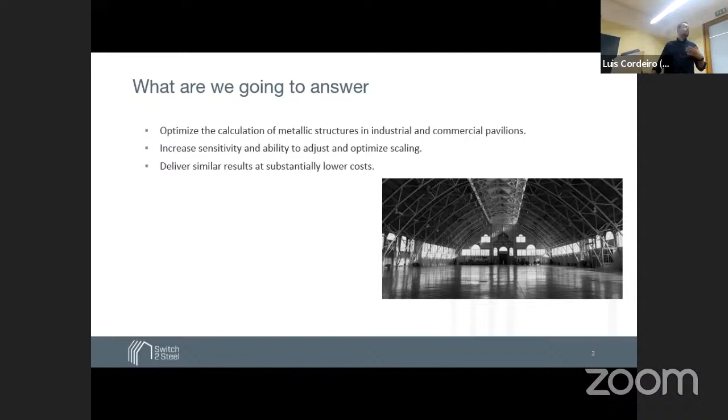The problem, as presented before, is that we have continuous legislation changes. We have legislation throughout Europe, but then very specific country-focused legislation, and we need to consider this in all the steps of what we are doing. It is really difficult to calculate these structures - so many options, so many types of steel, so many types of solutions. We tried to gather all the benefits of these different options and put them together in a way that we can provide solutions. You can simulate different options very quickly, and find quick and efficient results.

Always keeping in mind compliance and safety as presented before, and again the application, ensuring that these legislations are properly applied to all aspects of what we are doing. That is really important. And again, the protection for fire, which is one of the main drawbacks of using steel - we can identify in an automatic way which is the best solution for your specific needs, and give you an estimation of the cost. You can also compare it easily with other options available, ensure that these options comply with legislation, and in the end give the power to the user making these simulations and analysis.

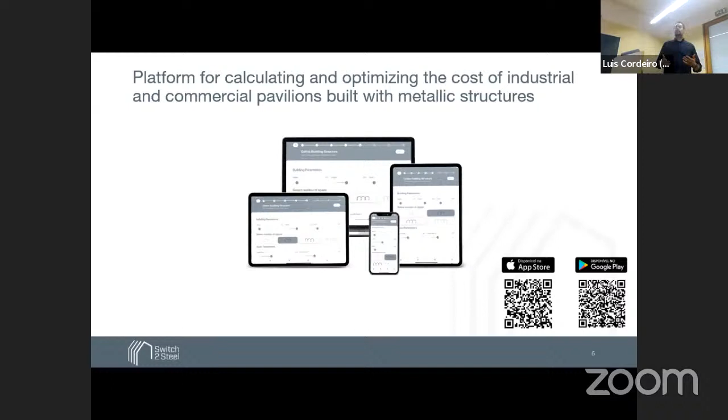Here you have the links for the application. The application, the platform that was developed, is already available for everyone to use. Of course this is ongoing work, so we are improving it every day. You have the application for Android and for iOS. You download it, define exactly what you need, and we process all your requirements and give you the results of what we believe is the best solution for you. These calculations are not done on your mobile phone because they are quite extensive and take some time, so you will receive a report and notification when the calculation is done. Depending on what you need, it can take from a couple of minutes to a couple of hours.

So the goal is exactly to have a multi-channel approach for everyone to access the tool, and then parameterize exactly what you need and get optimizations with different techniques of the structure and also the protections that are needed, taking into consideration the legislation, the characteristics of the pavilions, the fire protection, the transport, the seismic resistance, and the environmental impact throughout the whole chain of the building, from beginning to end.

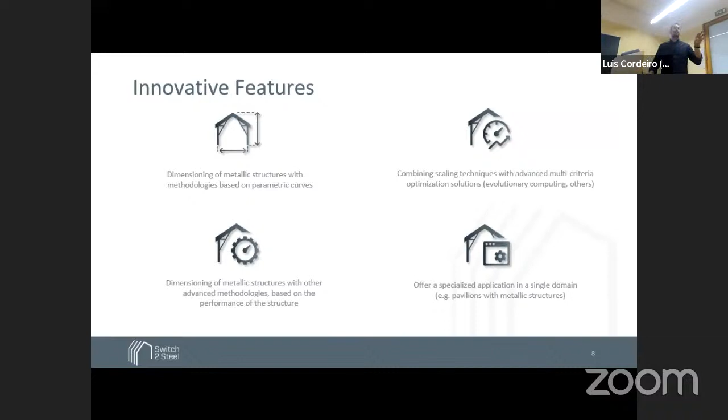As you can see, there are a lot of innovations here. We identified 4 innovation aspects of this work: the dimensioning of the structures, the combining of different techniques to give you the best solution, which will be presented later in more detail, and the dimensioning of the structure again with quite different solutions based on characteristics, basically a very focused solution on pavilion construction with steel.

Very briefly, and my colleagues will present this in more detail, we used genetic algorithms for some optimizations. Room and elevated temperatures were taken into consideration throughout multiple steps of the process. We used the finite elements method for some of the analysis and optimizations, always considering the applicable codes in all aspects to be compliant.

Instead of presenting the application with slides, we are going to have a real-time demonstration. We'll split this into phases: the first is where we say what we need to build, and the second shows the result. We'll design a complete step with some predefined configurations, and since that algorithm takes around 20 minutes to run, we'll look at a pre-calculated example.

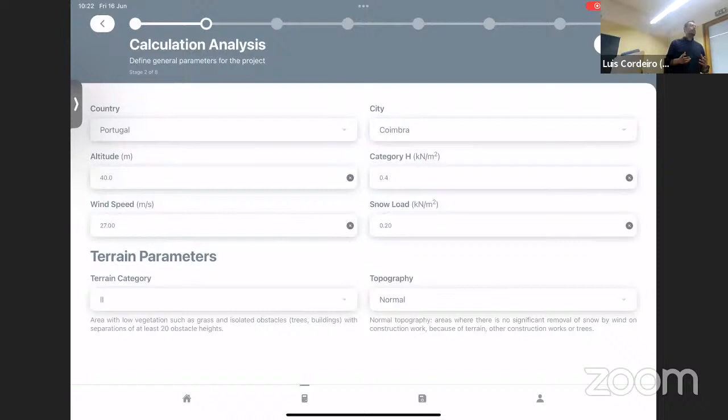Then we have the characteristics of where we are going to place our pavilion. We identify the country, the city, the altitude, the wind, and also the terrain topography—many characteristics that are critical for the proper assessment and optimization of the pavilion we are going to build.

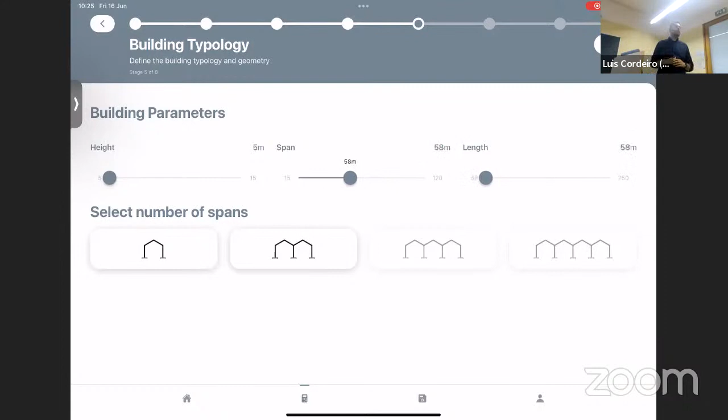When you start changing these parameters, we already limit the number of spans you can add. For example, if you select a quite wide span, you cannot build only one—you'll have to build 2 or 3 spans, depending on what's needed. The platform automatically helps you to make sure you reach a proper, feasible solution. So we're going to use these parameters with 2 spans, and we can even specify different sizes for each span—again, the system helps you with that.

Now that we've identified the spans, what do we need to do next? To identify our openings. What type of openings can we have? We have doors, windows, and roof openings—how many, and in which of the spans. That's configured there.

We can define a door, for example, and specify exactly its size and where it's going to be in our building—front, back, left, or right. This also considers the joint connection between the two spans; we can have doors there or not, depending on what we're defining. In this case, my colleague is creating a door there, and we can also create a window.

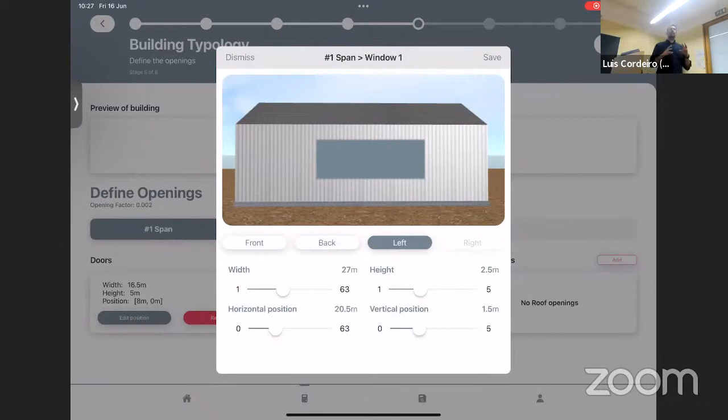Okay, we select the door in the front. Now we have the window on the left. Again, positioning exactly where we need or want it, because this will have quite an impact not only on the structure, but mostly on the fire protection. This will influence a lot of the heat dissipation and how we need to protect our structure.

Based on this, of course, door, windows, and then we have one of the most important for fire protection, which are the roof openings. Again, we position exactly the openings, how many we want, fully customized to fit what you need. Remember, you can build one simulation and then build on top of that a new one, meaning you can test without openings in the roof, then simulate with openings spread around the roof, and assess exactly what the difference is going to be, both in terms of the structure, mostly fire protection, but also cost, which at the end, most of the times, is the most critical one.

So we can continue. Again, we have defined only for one span. It's going to be exactly the same for the other one. So next.

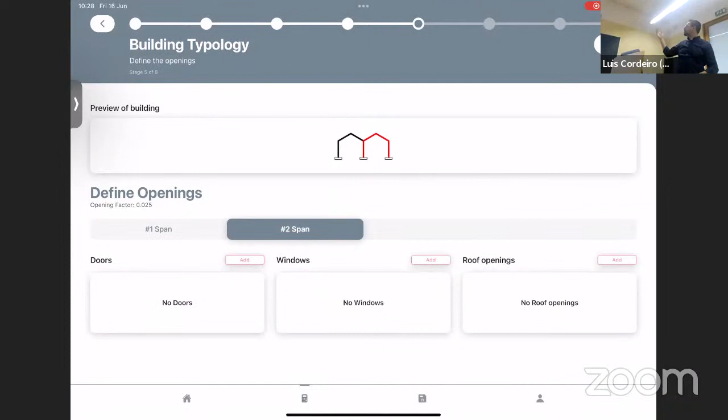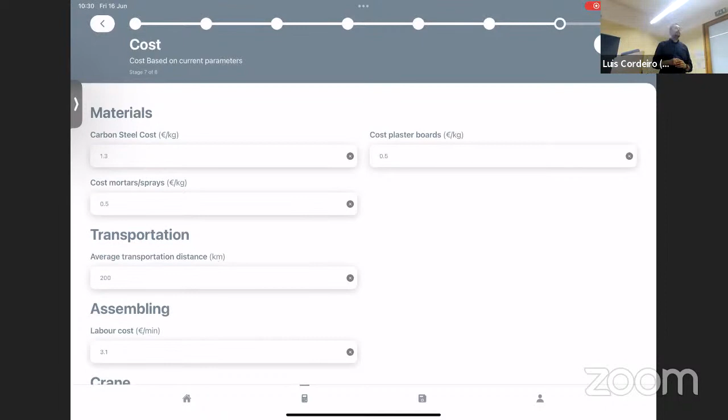Now we have the costs, one of our last screens. We have used the average costs for the materials and labor that we have identified, so these values are already preset in the configuration. But each one of you can define your own, because each company has a different way to negotiate and has different values most of the time. So you can define your own costs here and use them for the cost simulation.

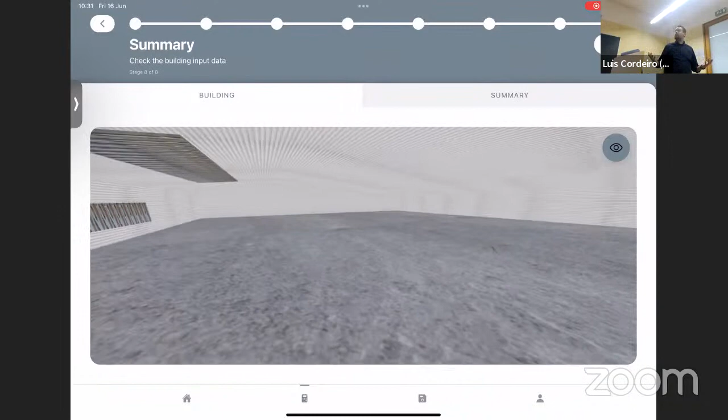Okay, and finally you can go to the next screen. We have the summary. Here we can see exactly what we have set. As you can see, we have a 3D model that you can play around with on your mobile device or here. You have the building. If you look inside, there is still no structure because we haven't yet started our calculations, but you already see the openings and how the building is placed, to validate it's exactly what you need. You can go to the front, left, or right visualization to focus more there.

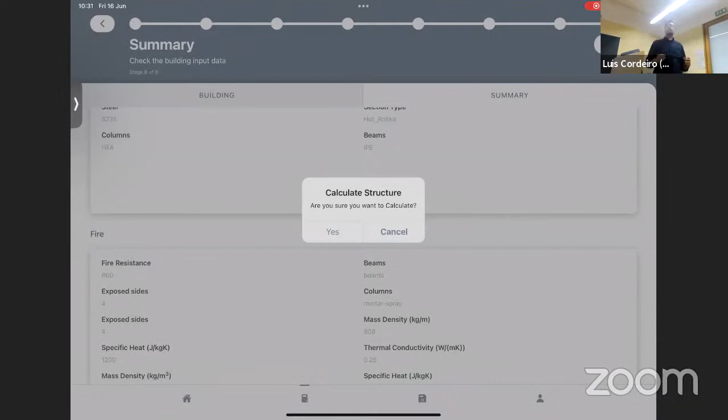Then we have the summary, which is basically just an overview of everything you have selected before. Then we have the final button to select, which is just do your work, calculate everything that I have asked for. Of course, we are going to do this, and it will take some time. So let's go and see this simulation already calculated.

Okay, so here we have the demo, and this is basically the final screens that we get. We have a summary, and now the 3D visualization again. But the big difference is that if we go inside, we already have the structure. All of this was calculated using all those optimizations that I talked about, which my colleagues will describe in more detail next.

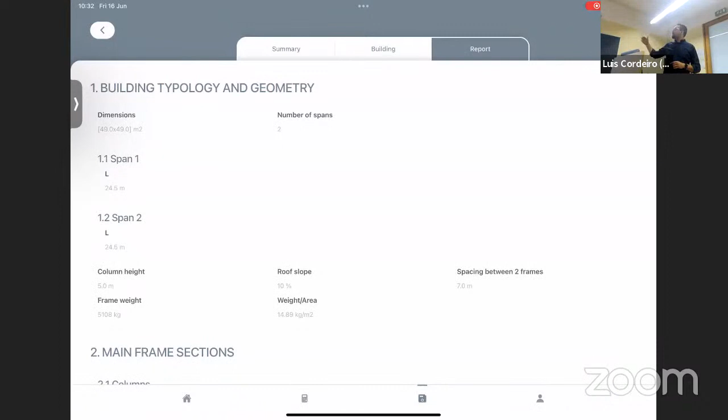And you can visualize everything from this perspective. Then we have quite a comprehensive view, okay, we can see only the structure. So if it's easier to identify, you can select the beams and get the details of each one, the columns, all of that. And we have the report, which at the end is what we really need, composed of some generic information. We have all the information about the structure.

Going down, of course we have an advanced version of the results that is provided, but this is the summary, which is usually the most relevant one. So we have the structure information. Going down.

Then we have the fire protection aspect. So what was identified as the optimum solution for the fire protection. And finally, the costs. Again, the costs—we have the steel costs, the transportation, the assembly, the fire protection, and at the end, the total cost.

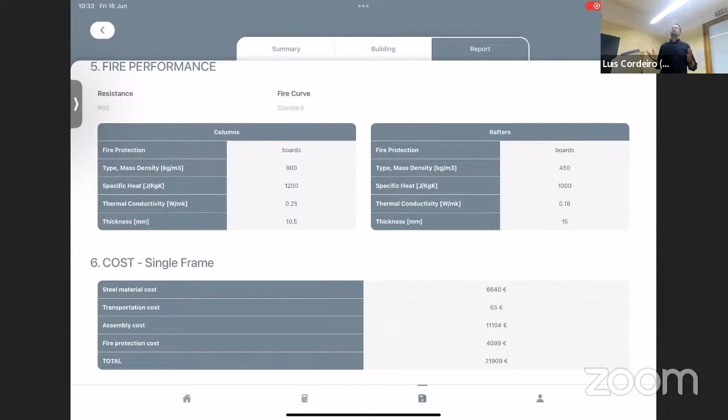This is what we have developed in this project and what is now available for you to experiment with, to use, and to give us some feedback on what was done. And with this, I conclude my presentation.

If you have questions, I think it's better if we address them all at the end.

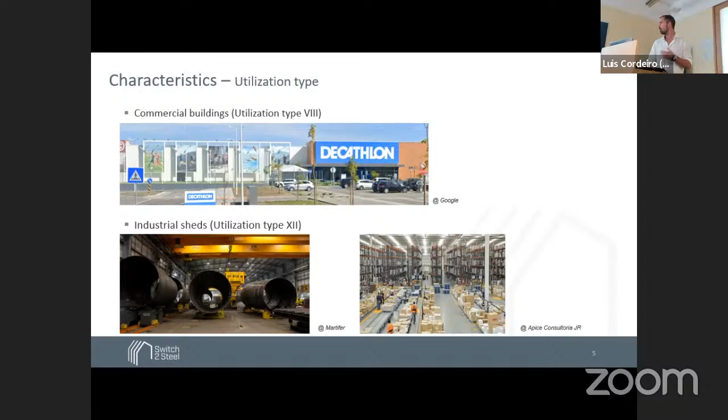So in terms of the utilization type of the buildings, as we said many times, it's mainly the industrial sheds, but also the commercial buildings, mainly based on a portal frame design. So the different typologies are covered in the app. Here you can see several typical examples.

Also, we identified—this seems very obvious, but in fact it's quite different—what kind of rafter you have in the top of the building. So is it just a uniform member? Is it a tapered member with haunches, with different variable cross sections in an area closer to the column, closer to the apex, and so on? So all of these aspects are something that is really tricky to calculate, especially manually.

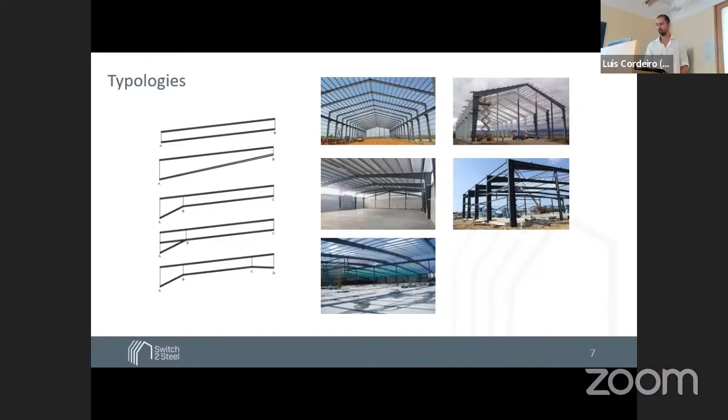It's impossible, in fact. And then also there are multi-span buildings up to 4 spans. Then all possible steel profiles that you can think of—hot-rolled, built-up sections, including class 4. This is something that is not included in many of the commercial softwares. And also you can see that there are tubular sections, so pretty much everything that is used in the design of this kind of buildings.

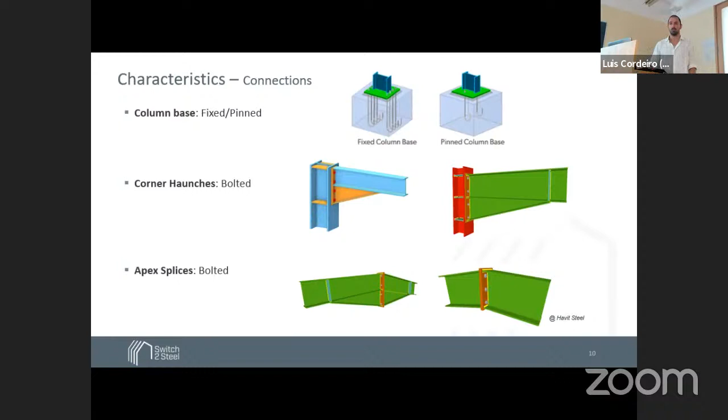Then also the connections, the base of the columns can be fixed or pinned. The corners, so this connection between the rafter and the column, it's a haunch that we also calculate, some pre-design of the connection, so it's not a full design, just a preliminary one. And then also there is at the apex a similar type of connection.

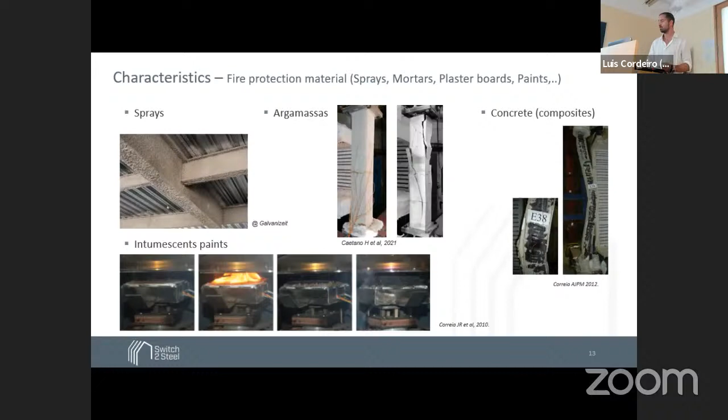Then the bracings, all possible configurations of the bracings and all possible types of profiles, mainly tubular cross sections. Then the steels, carbon steels are used in this project, so the conventional steel grades, not the high strength steels or stainless steels. And then also the fire protection materials - we try to include here all the relevant fire protection materials currently available on the market, including sprays, mortars, plasterboards, and paints.

So this is the scope, this is the scope of the project. But of course, as I said, there are some limitations. And first and foremost is the typology.

There is no trusses, at least not in this version of the project, so maybe in the future we will have Switch2Steel Plus or something that will include also the trusses. It's not difficult, but it takes a little exercise to play with the optimization of all these profiles. And also something like very specific geometry such as arches is also not involved in this project.

Then the dimensional limits - we put some limits in terms of the dimensions, something found in the literature. It's not that in terms of computation we cannot go beyond certain values, just that it doesn't make sense to allow the user to put 2 kilometers for the length or a height of 100 meters. So this is something commonly used for this kind of buildings.

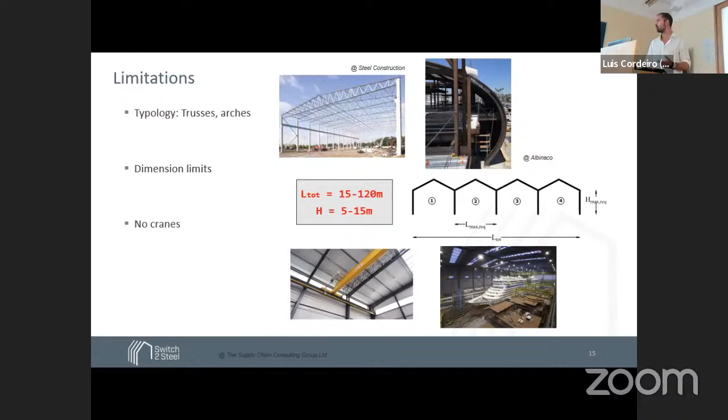And in terms of the loads - I will come later to the loads that are included - but the cranes and the loads from the cranes are not involved. So this is for warehouse buildings with storage, so the cranes are not involved. And also there is no explicit calculation of the foundations, so only the upper structure of steel.

Then the calculation algorithms - here I would divide all the calculations into 3 groups: the structural solver, the structural design, and the structural optimization. The solver is probably the best feature of this tool because we have our own solver. It's a linear solver, and for this kind of buildings with very severe stability issues and with variable cross sections and some very specific problems and aspects, it's almost impossible to use some simple databases.

Also, for this kind of buildings, as you may assume, it's really important to take into consideration second-order effects, and of course for that you have to have your own solver. So all of these aspects are covered both at ambient temperature and at fire design.

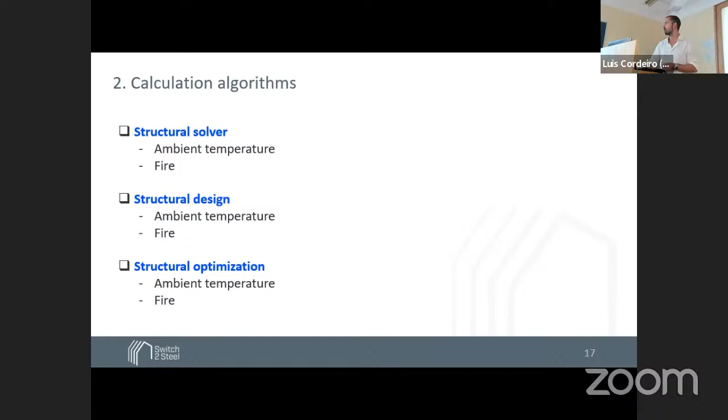So let's say something about each and every part of these algorithms. In terms of the structural solver, it's a linear elastic solver, so it's finite element based using beam elements. We use Python code here to write this.

And then what is also an advantage is that the load combinations and the load actions are automatically calculated for you, so you don't have to really go into the code and do the calculation of the coefficients, especially for the wind - this is really handy. And also automatically we generate the load combinations, so this is something done in a matter of seconds. I think this is a great advantage, because in the beginning I remember I had to calculate and check everything manually - for one of these it takes sometimes a whole day, or I don't know.

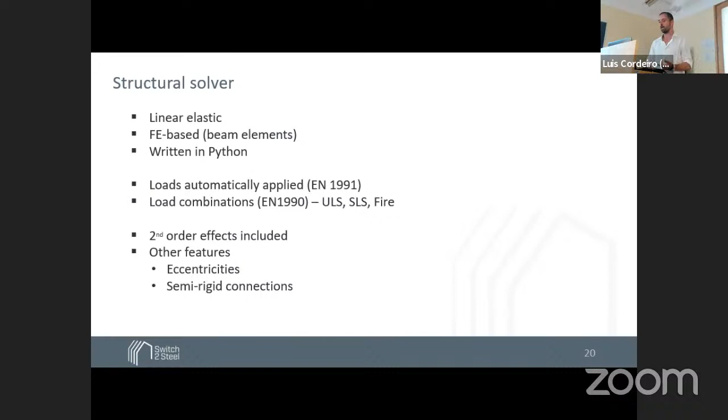There are some other features here, such as second order effects that I already mentioned. This is really important, and for that you need to have the solver and some extra possibilities such as eccentricities, semi-rigid connections, and so on.

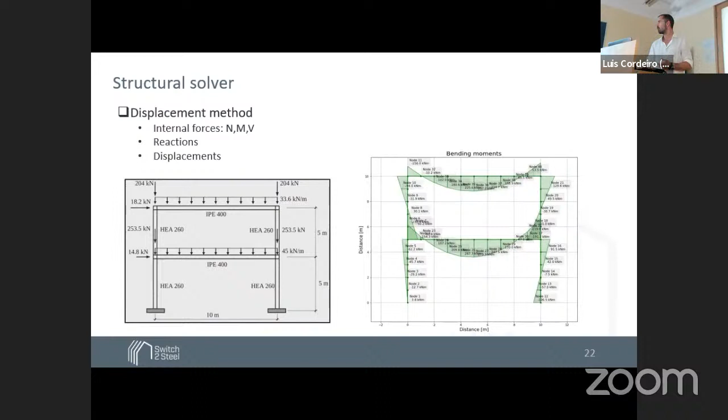The solver is, as I said, finite element based, using the displacement method. We build the stiffness matrix of the whole system, and such a routine is very convenient for Python code or any other language. We use Python. The objective of the solver is to get the internal forces, reactions, and displacement in every node, and from that point, using these results, we go to the design.

In terms of the load actions that are already involved in the solver part, we have the permanent actions, then we have the imposed loads. This is pretty much based on the Eurocode design, the imposed loads on the roof.

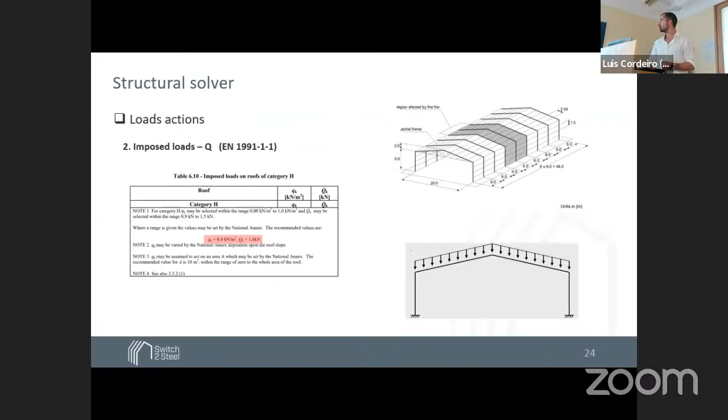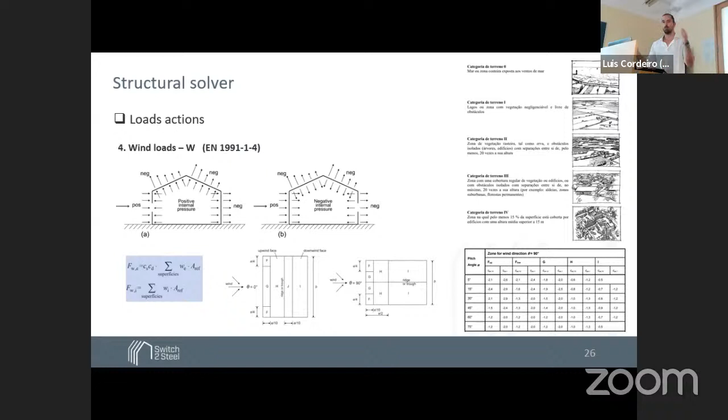Then the load combinations for ULS, the ultimate limit states, and for the serviceability limit states, are also calculated automatically for you and applied on the structure.

Other features: I explicitly included the second order effects using the stationary potential energy principles, so we can calculate the critical force, and then the second order effects are implemented using the amplified sway moments. Then the semi-rigid connections are also included—that's a possibility if we want to play a little bit with the rigidity between the rafter and the column or any other part of the structure. You can adjust the stiffness of the connection.

That was the solver. Once we have all the results, we can go to the next step, and there is the structural design. I'm not going to go into detail because this is very basic stuff from the Eurocodes.

For the ultimate limit states, we have to do the classification. As I said, we cover all possible classes, including class 4. Then the cross-section checks, the verifications, the member verification, stability—which is probably the biggest issue for these kind of structures—and then the connections. For the SLS verification, we verify the displacements, vertical and also horizontal.

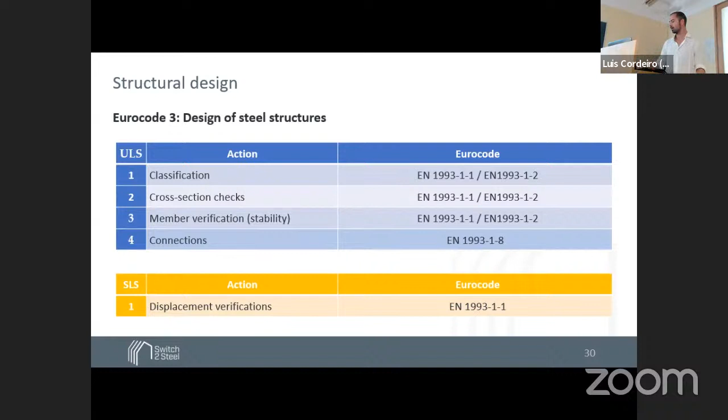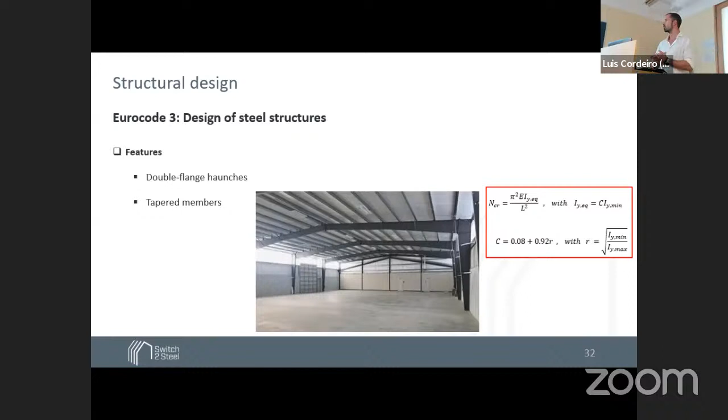This is one of the reasons why we opted for our own solver. You can vary the thicknesses along the length to optimize. In some cases, you can have a length up to 60 meters. The whole point of these structures is to consume the least material possible, and for that you need a proper solver to calculate the stresses and the forces in every part of the structure. This is done automatically.

Then there are some specific aspects for these kind of structures. We have the purlins on top of these buildings, and they can act as lateral restraints. But if you have wind, then the bottom flange, which doesn't have any purlin, is exposed to compression, and there is a problem with stability.

There is no such calculation provided in the codes, so we use some literature from King and SCI publications to calculate this kind of phenomenon. The point is that even if the top flange is in tension, there is some benefit from the purlins, and this has to be calculated somehow. In these SCI publications, we have this method, so this is also included here. Finally, there is a class 4 cross-section included.

This is something that is quite simple if you have just an axial force or just a bending moment for the symmetric cross-section. But in many cases, especially for tapered, monosymmetric cross-sections, the problem turns out to be a little bit more complex. So this is all involved in this calculation.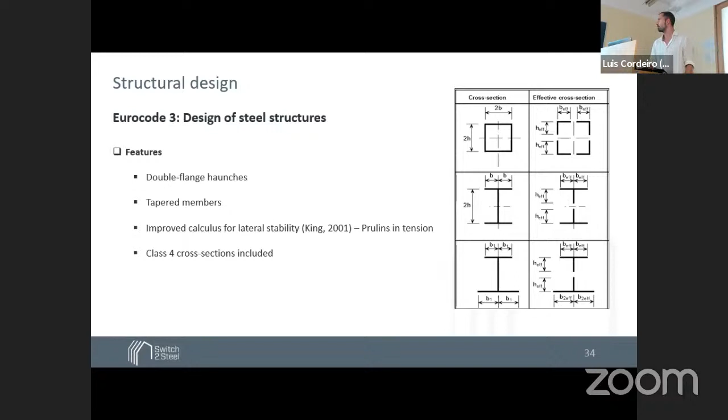And then last but not least, there is a fire design. Our methodology is based on a typical method that is used, with two steps. In the first part, we treat the fire load, calculating the fire curve. There are two options, as you saw in the app: a standard curve, and the advanced curve, which is the natural curve using another software that we linked to our platform.

And then the mechanical actions are included through the load combination, accidental ones from the Eurocode. So this is the fire load. Then in the second step, we have the structural response and the structural design according to the respective Eurocode 3.1.2. So this is also done.

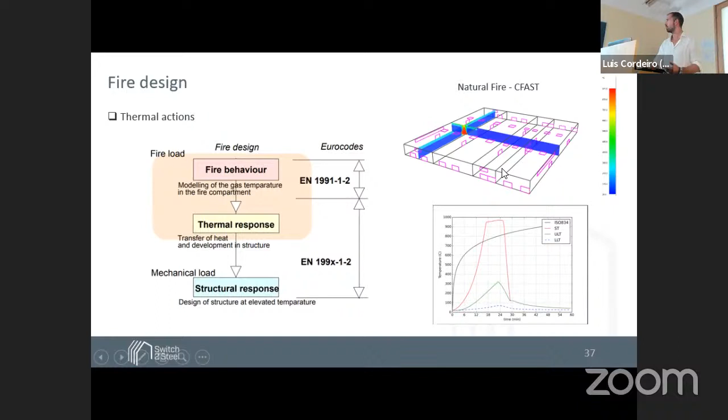And this is what we are doing in a matter of a couple of seconds. So this is the advantage of the tool. Then the second step is the application of the accidental loads according to the code. Then we have this heat transfer according to the code, for unprotected and also for protected steel cross-sections.

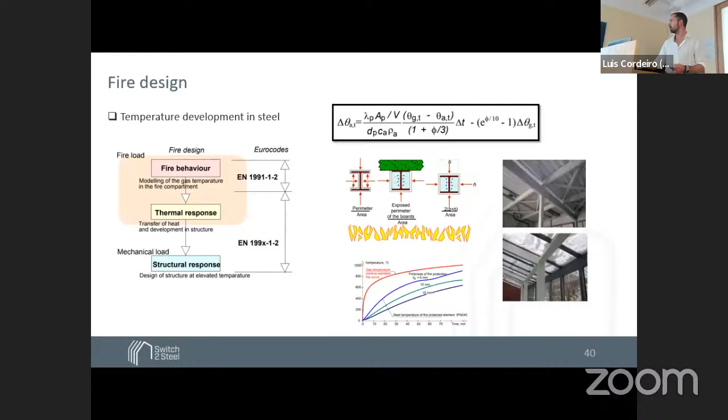And then in the last step, once the steel frame is heated, let's say, we have the decline in properties. This is important on the level of the solver because the properties change. And then we have the matrix of the system also varying with the changes of the modulus of elasticity.

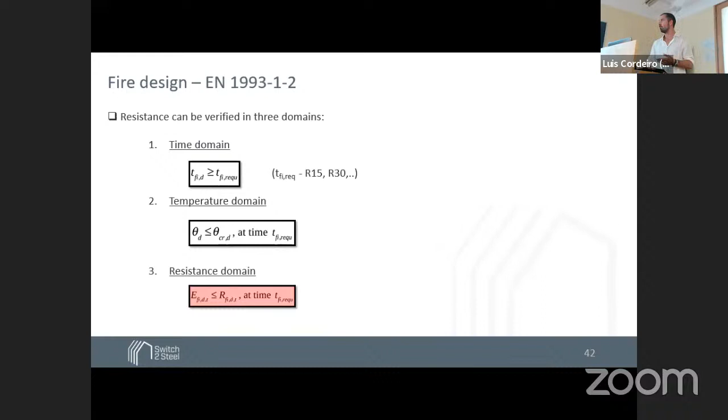And then in the structural design, with the new properties of the steel, we calculate the resistance of the elements. According to the code, as you know, there are maybe three ways to verify the fire resistance. We use in this project the resistance domain, so it's pretty much the comparison between the resistance and the applied load in terms of fire.

And then the third part, the third group of algorithms, is the structural optimization, which is applied, as I said, in this phase using the genetic algorithms, and also for the fire protection.

So pretty much this is what takes some time. Depending on, especially for built-up cross sections where we have so many variables, this can take some time if we really want to choose the best solution of all. Of course, we can relax this a little bit to reduce the time, but then we cannot guarantee that the solution will be absolutely the best. So this is just the compromise between the time and what we want.

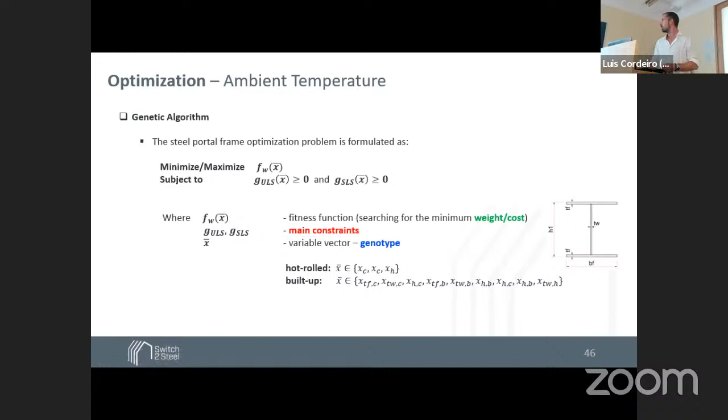And as I said, for the built-up cross-section, there is a really wide range of parameters, because you can technically optimize every possible thickness, and then it takes some time. So this is the genetic algorithm involved.

Now regarding the cost, we currently calculate the cost of one frame, because to calculate the cost of the entire building, there are so many unknowns that we didn't want to specify. As Cordeiro said, almost every company has their own panels for the roof, different things that are not covered in this project, so we don't have a database of all the panels used in the industry.

So we wanted to specify that there is a limit. We calculate the cost of what we calculated, and the rest is something every company can add as extra cost. The parameters we considered are material properties and the cost of steel, and fire protection, because fire protection is something that is pretty much hidden - you cannot find the prices of these things. So we just allow the user to define his own price.

Transportation is based on the distance to the factory where we're going to produce the elements, and then assembly costs consider basic parameters such as labor cost and the crane to be used, the effective utilization factor, the crane span, and so on. There is an algorithm from the literature that we followed for the calculation of the cost.

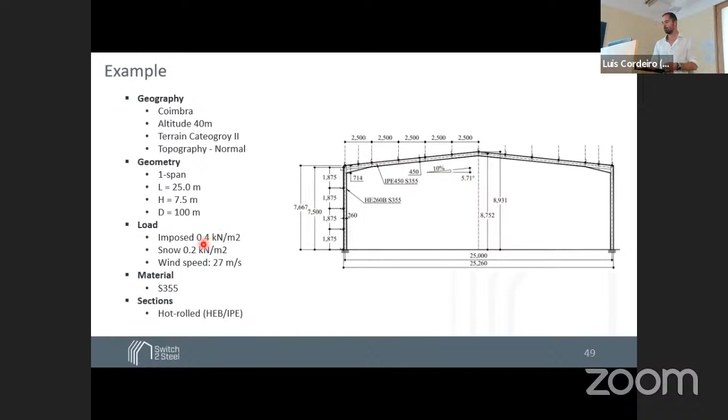This is very simple to apply using the tool. All these inputs you can literally define on your mobile in a couple of seconds - the location, the material, the profiles, and finally the geometry. This is what you saw in the previous slide, already defined here as input.

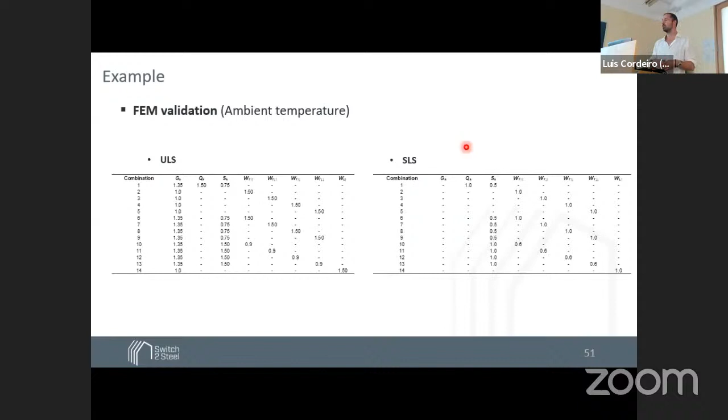The load combinations - this is just a schematic representation of how many combinations are considered in this case, as many as 14 different combinations with wind lifting, wind pushing down, all possible combinations from the Eurocode you can imagine, including the SLS verification.

But when we start comparing the time spent obtaining these results, it's almost incomparable. For Switch2Steel, the modeling takes about 5 minutes for somebody who never used the tool, and I believe less than 1.5 minutes to run the analysis, especially for the user-defined case here - it's a matter of maybe 30 seconds.

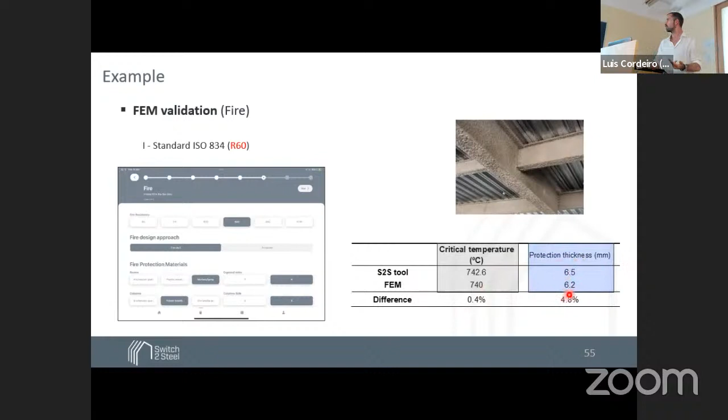What is the best part about the tool is that you can define much more advanced fire curves and fire calculations - you can vary the properties of the walls, floor, roof, or any material. You can place as many openings as you want to assess how it impacts the calculation. You can choose any fire protection material and how many sides of the columns or beams are attacked. There are so many options included in this part.

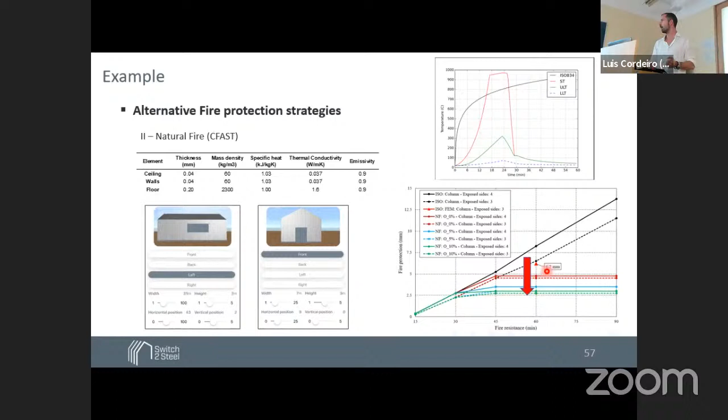Then using the tool, in a couple of minutes, you can optimize the fire protection and the strategy for how you're going to protect your building. As you can see, we can go down to 2-3 times more economical solutions. So this is, I think, the biggest advantage of this tool - that in a matter of a couple of minutes, you can really calculate the fire protection. So this is the good thing.

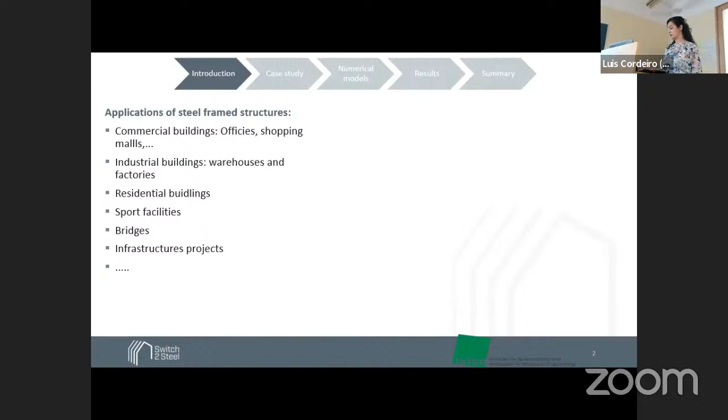Here you can see some applications of steel frame structures like commercial, industrial, residential, etc. We're going to focus more on the warehouse building, as it's selected as a reference case study here. But fire in these steel frame structures can be dangerous because of a rapid increase of steel temperature as a result of high thermal conductivity and high section factor. This sudden increase of steel temperature can lead to a decline in structural stability, giving these steel frame structures low fire resistance and compromising the competitiveness of steel frame structures in the construction sector.

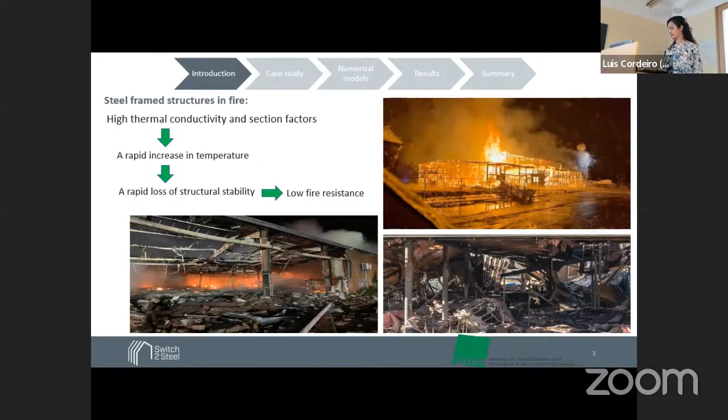So the question is, what is the solution? Fire protection materials can be one of the solutions for that, and gypsum-based fire protection coatings are used in this study.

The reason for choosing them is that their effectiveness in improving the fire resistance of structural steel members has already been proven in research studies carried out at the University of Coimbra, especially when high fire resistance ratings were required.

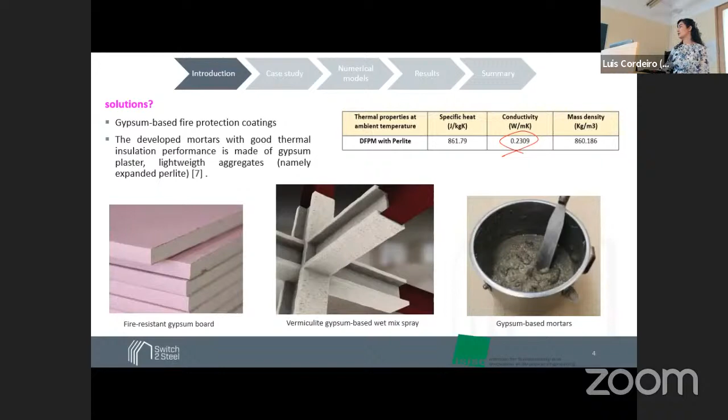These fire protection mortars can be used in different ways, like boards, sprays, and mortars. This developed gypsum-based mortar is composed of lightweight aggregate, expanded perlite, and gypsum plaster, and it has very low thermal conductivity and very good specific heat capacity, making it a perfect solution to protect steel frame structures against fire.

So what's the objective of this study? The objective is evaluating the numerical fire behavior of these structures protected with fire protection mortars using three-dimensional finite element models developed in Abaqus software, and calculating and optimizing this fire protection for industrial and commercial metal buildings.

We present the hypotheses and parameters taken into account in the numerical modeling to achieve an accurate and efficient thermomechanical response for these fire-protected steel frame structures, and study the influence of some crucial parameters on the fire protection optimization and critical temperature of these structures at high temperature, like lateral restraint, thermal properties of fire protection, and fire action.

Finally, comparing the finite element results with some results obtained from the Switch2Steel computational tool that Philippe talked about in the previous presentation.

For this work, an example of a two-pitch steel industrial shed located in Figueira da Foz is selected as a reference case study. The span of the main portal frame is 25 meters with a column height of 7.5 meters and a roof slope of 10%.

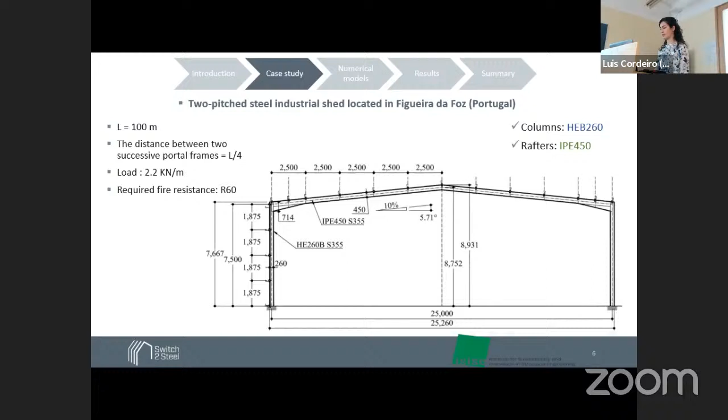The finite element model of half of this portal frame under high temperature was developed with respect to the symmetric rule in Abaqus. The structural elements are shell elements, with mesh sizes of 25 millimeters across the cross section and 50 millimeters longitudinally.

Three different analyses named thermal, linear buckling, and nonlinear geometric and material static analyses were sequentially carried out to assess the fire behavior of these structures protected with such mortars.

Here you can see some... I think it will be better to use... do you know how can I use the pointer? Yeah, I think I can.

For the local and global imperfections, the maximum magnitudes of L over 1000 and width over 200 were implemented in the finite element model for the structural analysis, as recommended in Eurocode.

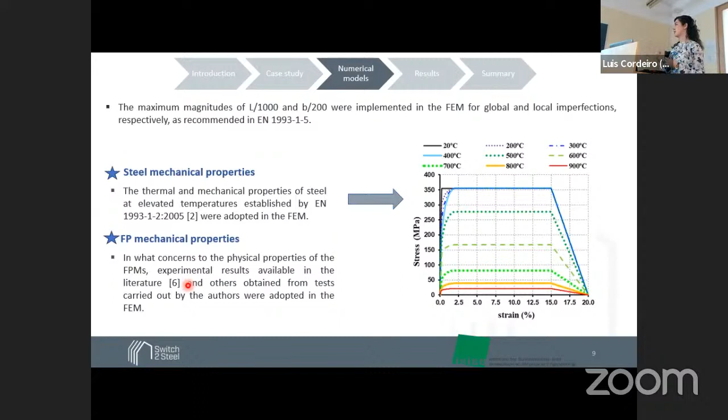Regarding the fire protection mechanical properties, experimental results available in the literature and others obtained from tests carried out here were adopted in the finite element model.

A comparison with the corresponding values obtained using the Switch2Steel tool has been made, and no significant difference was observed; they are comparable.

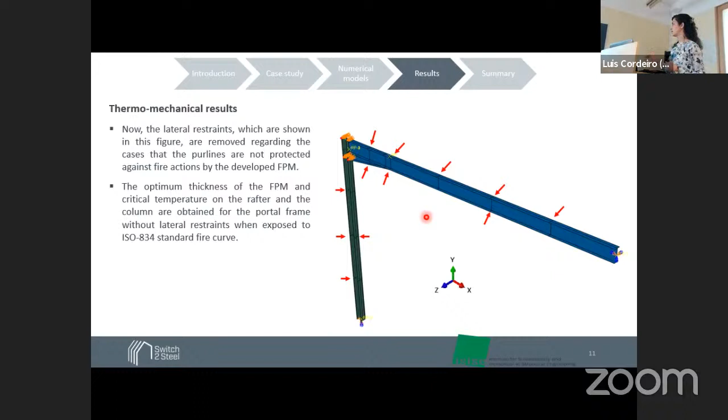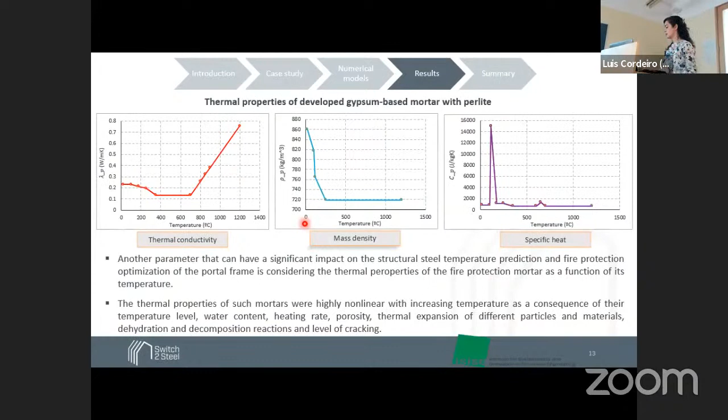Another parameter with significant impact on structural steel temperature prediction and fire protection optimization of these portal frames is considering the thermal properties of the fire protection as a function of its temperature. That is the case in reality, which the Eurocode disregards. The thermal properties of these fire protection mortars are nonlinear with increasing temperature, as a consequence of temperature level, water content, heating rate, porosity, thermal expansion, etc.

The next parameter we considered was the thermal action. Thermal action plays a crucial role in assessing the structural fire behavior of these frame structures and optimizing them. So in this section, instead of using the standard time-temperature curve based on Eurocode and ISO 834, which assumes a uniform time-temperature relationship for gases surrounding the element, we use the natural fire curve, which accounts for the effective heat flow transfer through the fire spread into the element.

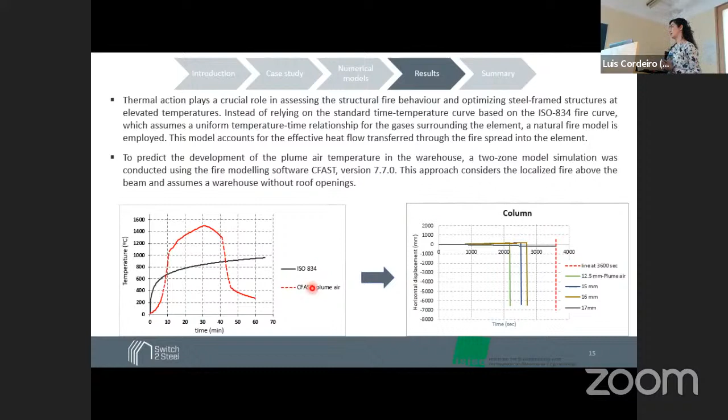To predict the development of the plume in the warehouse, the two-zone model in the CFAST modeling software was developed. This approach also considers the localized fire above the beam and assumes a warehouse without roof opening. You can see here the fire protection optimization when the plume is considered instead of a standard ISO fire curve.

The thermomechanical results in terms of fire protection thickness and critical temperature are shown here, and they are compared with the corresponding standard fire curve. We can observe that for the natural fire curve, there is a significant difference in the optimum fire protection thickness, highlighting the crucial role of thermal action in the fire protection optimization of these frame structures to ensure a safe and optimal solution for risk mitigation.

Regarding the significant importance of accurately predicting the thermal action and fire scenario for fire protection optimization of these structures, another scenario is taken into account. In this scenario, the rafter is exposed to the same plume curve, but the column's lower part is exposed to a colder time-temperature curve, and the upper part is exposed to a hotter time-temperature curve.

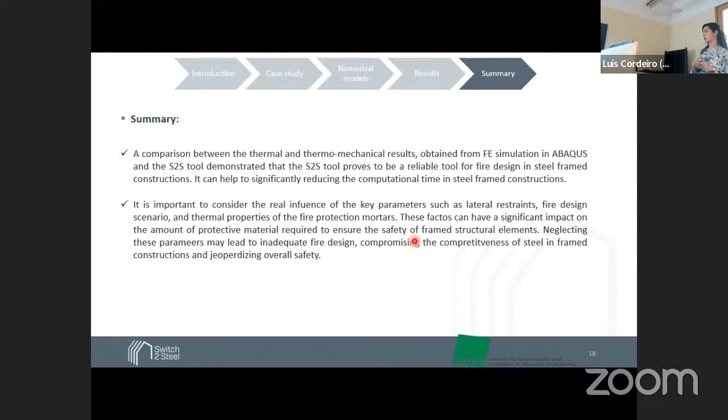As a summary, a comparison between the thermal and thermomechanical results obtained from finite element simulation in Abaqus and Switch2Steel shows that the Switch2Steel tool proves to be a reliable tool for fire design of steel frame construction, and it also helps reduce computational time. It's exactly what Philippe told us in the previous presentation. It's important to consider the real influence of key parameters such as lateral restraint, fire design scenario, and thermal properties of fire protection, because these factors can significantly impact the amount of protective material used in steel frame structures. Neglecting them may lead to inadequate fire design, compromising the competitiveness of steel frame construction and jeopardizing overall safety.

And this is the reference. Thank you so much.

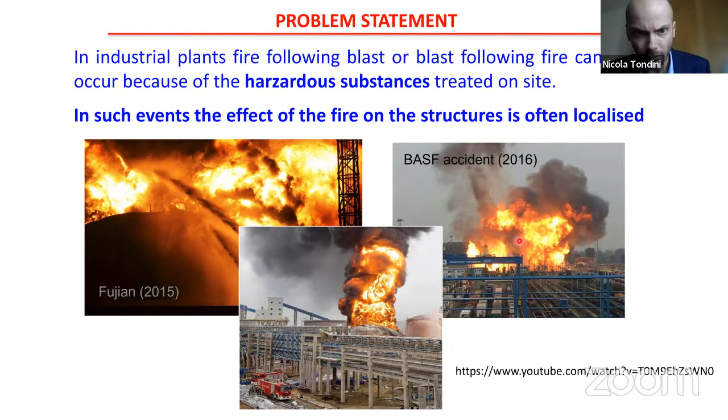Here are some steps that we have to conduct in order to check a structure under fire. The first step, of course, is the fire modeling, that can be done by means of nominal fire curves or natural fire curves, for example parametric curves, which are the simplest that we can find in the literature and in the code, but we can also use zone models, field models, CFD, or localized fire models found in the literature or in the code.

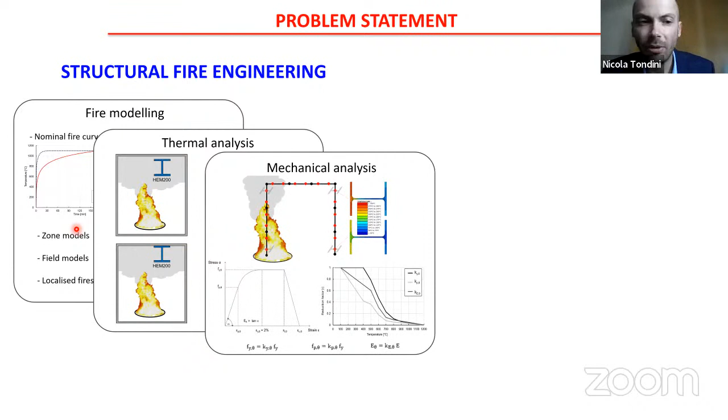Then, of course, we have to perform the thermal analysis, to compute the thermal field in our structural elements, and afterwards the mechanical analysis, which can be done with simplified methods or finite element codes.

Here are some protection strategies that we can apply: for example, active fire protections like venting systems, smoke curtains, sprinkler systems, or passive fire protections such as concrete encasement in concrete composite structures, intumescent paints, sprays, or boards.

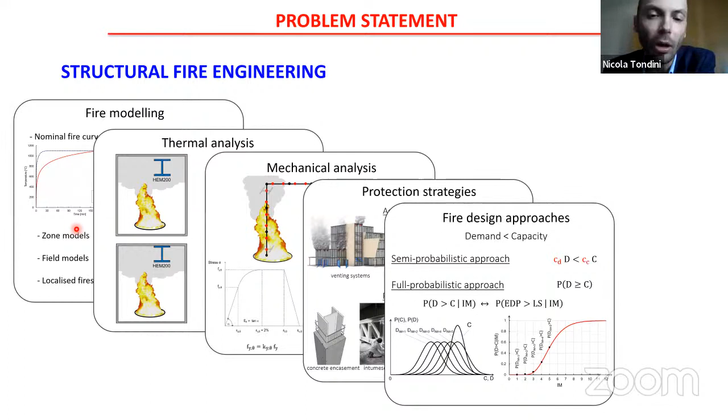In the end, how can we check a structure? Typically it is done according to Eurocodes, which are based on a semi-probabilistic approach. There are characteristic values derived by means of probabilistic analysis, but in the end what we perform is a deterministic analysis. Otherwise, we can employ a fully probabilistic approach where the uncertainty of the parameters are explicitly used in the structural check, with probability distributions, and then we can build fragility curves.

Let's start with the localized fire definition. Typically, when in compartments the flashover is unlikely, or in the initial phase of the fire, as Aldina said in the first presentation, in large warehouses or commercial buildings the fire load is such with respect to the size of the compartment that we can have a very non-uniform distribution in the building. So localized fires can also be a source of hazard in this kind of structures.

The modeling of localized fires can be done by means of analytical models that are typically simplified. Some analytical models, as I will show later, can be found in the standards, particularly in the Eurocodes, or we can use numerical modeling, for example computational fluid dynamics, which of course is much more demanding in terms of computational burden. Here is what is inside the Eurocode at the moment, in the present form.

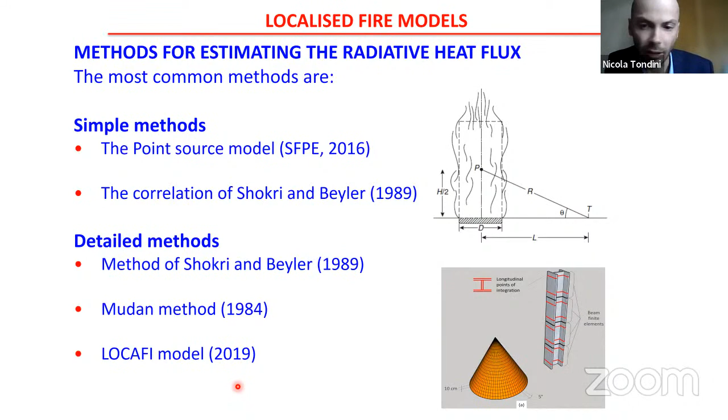So why was there a need to develop a new model? These models were already available in the literature, so why the development that ended up in the LOCAFI model? Because the other methods, since they are analytical methods, have some limits in their application field.

What we were looking for is a model that can be used across all ranges of heat fluxes. The methods I mentioned before are not valid, or not very accurate, in some intervals of heat flux, or they have high variation in the data. We wanted to develop something with low variation in the data, and safe without applying safety factors. We also wanted to model something that can estimate the heat flux on all four faces that compose the cross-section of the column, not only the face directly impinged by the heat flux. And we wanted to exploit the localized fire correlations already implemented in Annex C of Eurocode 1 Part 1-2, such as the Heskestad correlation.

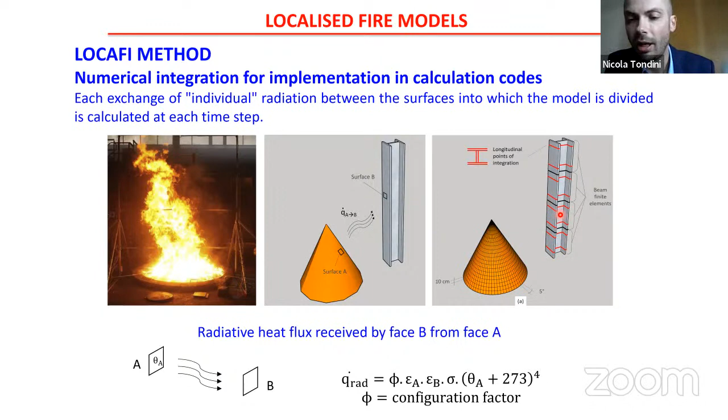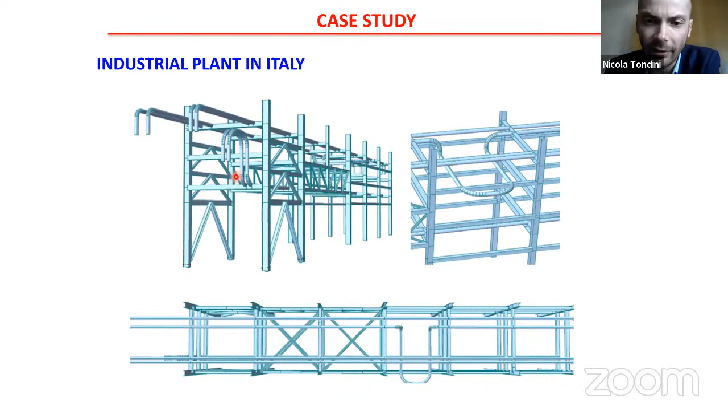Here there is the description of the case study that we used. It is an actual case study, a refinery located in central Italy on the eastern coast. Here we had the data of this supporting structure close to the tanks, and here we had this pipe rack. There are many pipes on it.

The structure is not protected, so we simplified it a little bit. The structure is a moment resisting frame with respect to the short span, whereas it is a braced frame with respect to the longitudinal direction.

Here are the loads that we applied to the pipe rack, which were estimated based on the liquid passing through the pipes, and some operative loads that are applied also during the working phases of the steel pipe.

Since we performed an analysis that wanted to explicitly include the uncertainty of the parameters, we had to decide what were the main relevant uncertain parameters. So we decided to include the fire in terms of its size, the diameter, and the type of fuel. We used different fuels, and based on this choice we had some uncertainty in the heat release rate, and also in the position of the fire with respect to the structure.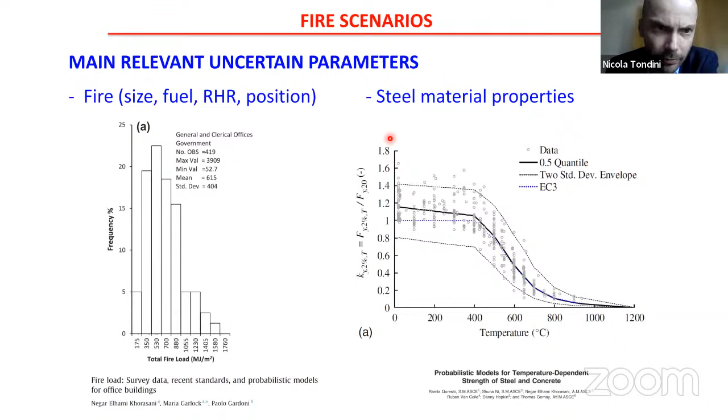Here we considered 4 cases with increasing variability. In the first two cases, we included the diameter of the fire in a uniform distribution, with equal probability of occurrence for different diameters. In the first case, we used a deterministic yield strength, the nominal characteristic value.

In the second case, we introduced the probabilistic definition of the steel yield strength and how it varies with temperature. In the third and fourth cases, there are two different situations where the fire diameter is based on the type of leakage that may occur in a petrochemical plant.

For example, we may have leakage from the tank or from the pipe, and this can lead to different phenomena in predicting the diameter of the fire.

Here, for example, is how we compute the diameter of the fire based on leakage from the tank or from the pipe. The driving force in determining the fire diameter is the hydraulic pressure.

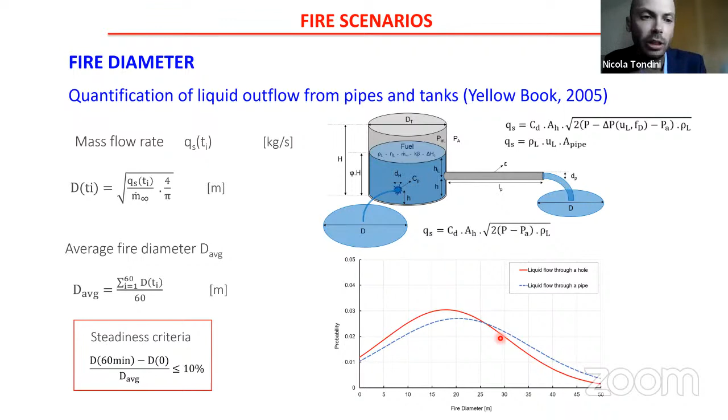We also used steadiness criteria to estimate diameters that can last at least 60 minutes. In case studies 2 and 3, we used these distributions, and then applied Latin hypercube sampling to sample all the values.

For case study 0 and case study 1, we used a uniform distribution of diameters, with 11 diameters ranging from 5 to 30 meters. The distances from the structure ranged from 0.5 to 6 meters, and we also considered 7 fuels with different properties, such as heat of combustion, that lead to different rates of heat release.

Here is an example of the outcome of a thermomechanical analysis, showing a heptane fuel with a fire diameter equal to 20 meters. You can see the deformed shape of the structure and the thermal field in the columns. There is a large thermal gradient in the structural element because of the localized fire.

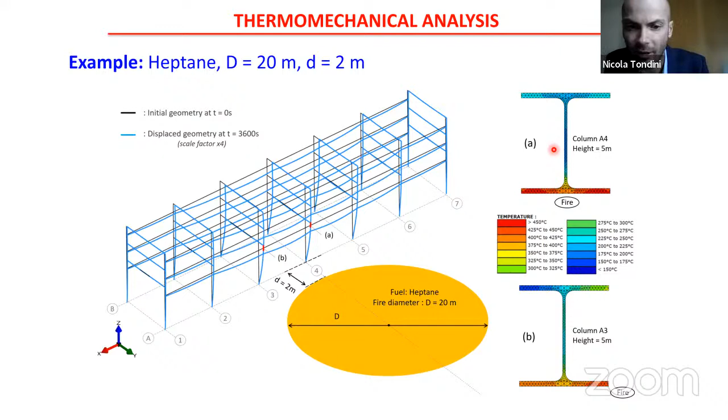To build up the probabilistic framework, we had to decide on intensity measures that characterize the severity of the fire, and engineering demand parameters that characterize the structural response. Then we applied methods to build up the fragility functions, and established the efficiency and sufficiency of our probabilistic models.

Here are the intensity measures that characterize fire severity. Some are quite straightforward, such as the diameter of the fire, the structure-fire distance, the heat release rate, and L/D, which is the fire position with respect to the fire diameter. But others are less straightforward, for example, the maximum average heat flux impinging the structure.

We analyzed all of them, since they are not trivially relevant and could not be found at the beginning in the literature, so we had to think about them. L/D, for example, is a function of the diameter and the structure-fire distance, and the maximum average heat flux impinging the structure was computed according to the analytical LOCAFI model.

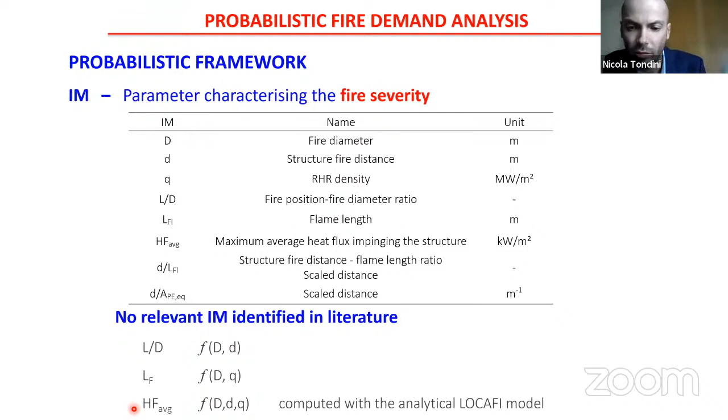For the engineering demand parameter that characterizes the structural response, we considered the interstory drift ratio, the axial load in the structural elements, bending moment, the maximum average temperature in the structural element, or the average temperature. What we found relevant for this case study was the interstory drift ratio, because it is independent from the fire scenarios.

It is also quite easy to evaluate, and it is a global parameter of the structure. We could also relate it to some damage states deriving from the seismic engineering field, for example, from FEMA 356.

The probabilistic framework was built up by means of cloud analysis, where the engineering demand parameter is assumed to follow a log-normal distribution when conditioned on the intensity measure. In the log space, we can apply a linear regression in order to compute the probabilistic demand model.

In the end, we would like to build up fragility functions to see the probability that the engineering demand parameter is larger than a limit state when conditioned on an intensity measure. We took two limit states related to life safety and collapse, and here is an example of fragility curves that I will go into more detail on later in the presentation.

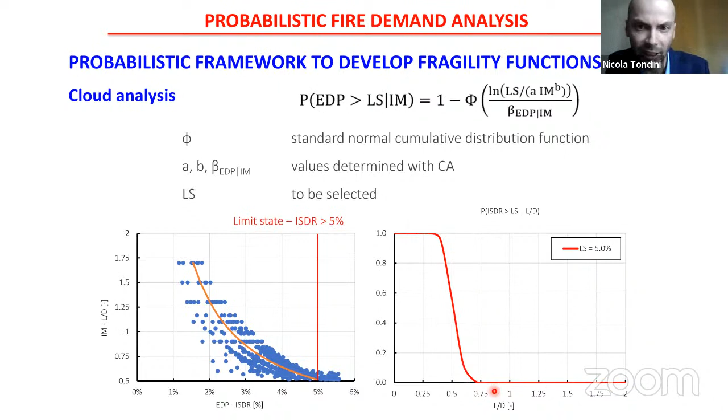Here are the probabilistic demand models for all the intensity measures I mentioned before, for the four case studies, based on the interstory drift ratio.

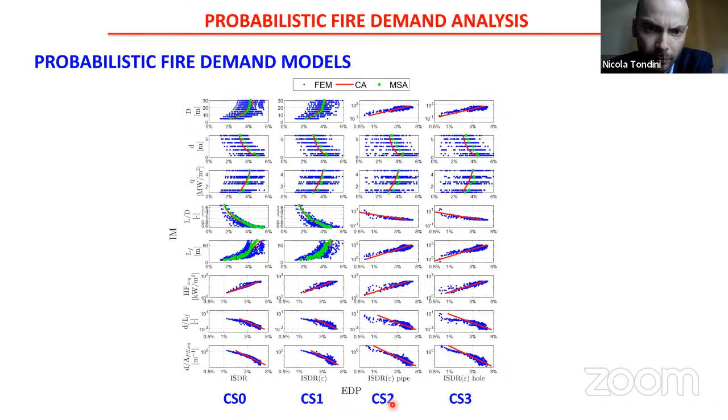What we have also to perform is to check the efficiency and sufficiency of our probabilistic models. The intensity measure can be considered efficient when there is low variation between the predicted engineering demand parameters and the actual engineering demand parameters based on our probabilistic demand model. When the dispersion is less than 0.3, this intensity measure can be classified as efficient.

There is also a sufficiency requirement. This is when the structural response, the engineering demand parameters to the demand, doesn't show correlation in the parameters that can define the demand. In this case, the sufficiency was determined relative to the intensity measures that we considered.

Here we use an information theory concept that can be found in the literature. The highest information was given by the heat flux, the maximum average heat flux received by the structure. There was also another intensity measure, but I'm not going into this. And also the L over D, which is quite straightforward for practitioners to understand.

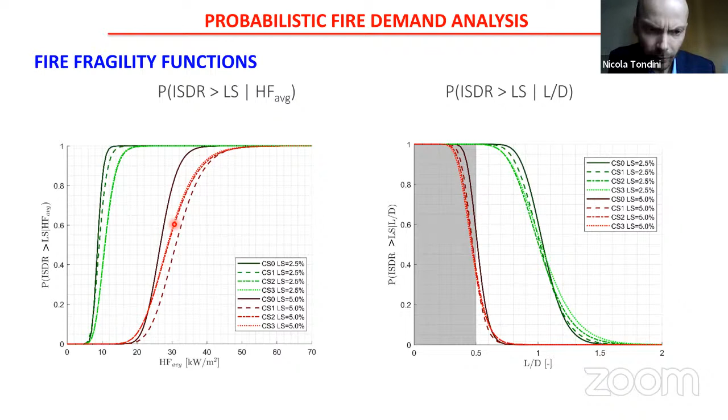Whereas when we introduced the uncertainty in the steel yield strength, the probability of exceedance of the limit state is lower. And if we consider more uncertain parameters, this probability of exceedance is lower. So here, for example, case study 2 and case study 3 most of the time provide the lower probability of exceedance of the limit state.

And then also it can be used. So to finish, I hope that was more or less in the 20 minutes. So this is the conclusion.

We developed a probabilistic fire demand model for a steel pipe rack exposed to localized fires. In this presentation, I only showed the fragility functions that were developed by means of the cloud analysis; we also used the multi-stripe analysis. The maximum transversal interstory drift ratio was found to be the most suitable engineering demand parameter.

Also in terms of intensity measures, the maximum average heat flux impinging the structure and the ratio between the fire position and the fire diameter, L over D, were the most efficient intensity measures to characterize the fire severity, and also the most sufficient relative to the other intensity measures that we used. And we could build up these fire fragility functions that can be used to assess and quantify the structural capacity of this steel pipe rack.

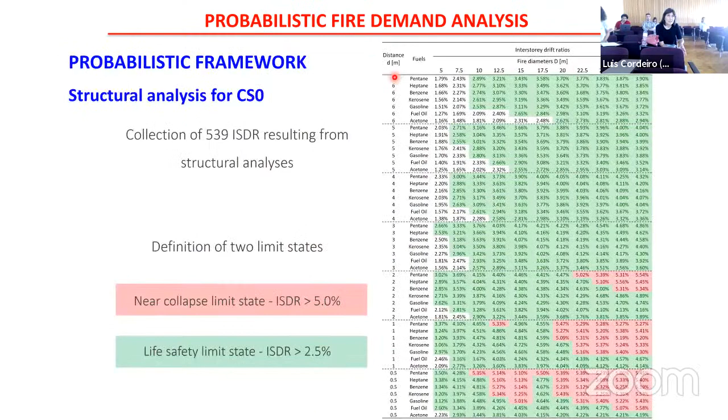Okay, my question is about the first part of your presentation, the part 1.2, the approach to calculate the fire loading in localized fires. You are involved in the new generation of the Eurocodes, and I know there are some changes in this part of this annex of the Eurocode 1.2. I would like to hear from you what will be the main changes, and if the work that you presented here will contribute or not to this part of the Eurocode.

So yes, there will be some changes, namely in Annex C. In Annex C, the Locafi model will be implemented, the analytical part. So the designers will be able to predict or compute the heat flux received by a column when it is outside of the fire, so the radiative heat flux.

So in order to complete all the parts, the structural element can be inside the fire or at the ceiling level, but also outside. This is the main change, I would say, in the new Eurocode 1 part 2.

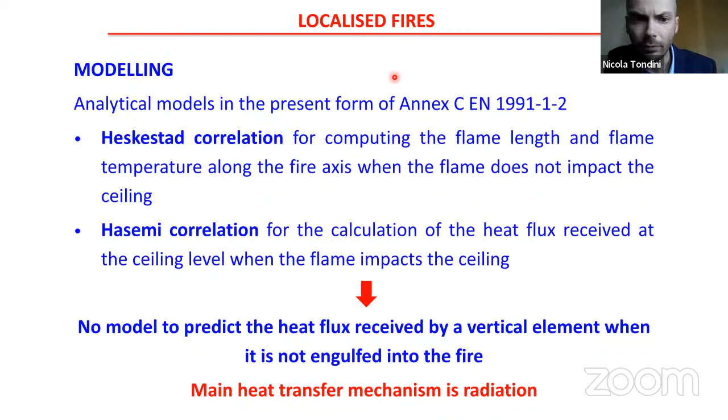And then, of course, these works that we developed, basically there are two papers. I'll show you these two papers. The first one was with some tests performed by the University of Liège within the Locafi project. Also, there are a couple of papers from Ulster University that also performed some tests.

And then the model, the background of the model, is in this paper that was published 4 years ago, between myself, the CTICM, and also ArcelorMittal. Here you can find the background, but also at the link I showed in the presentation, you can find some material, a design guide, and examples on how to use it.

And in SAFIR, Jean-Marc Franssen also included Locafi directly in the SAFIR model code. These two papers were done after the development of the model, based on a European project that was basically all petrochemical plants, and it's a collaboration with ArcelorMittal.